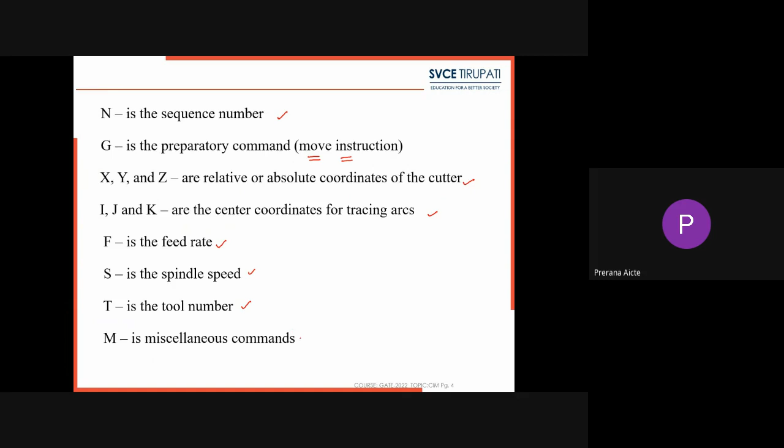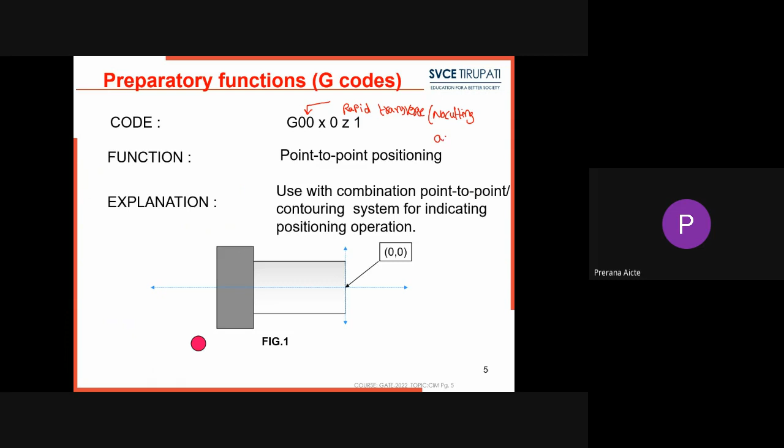Then what is G code? G codes are nothing but preparatory codes. The first is G00. What does G00 suggest? It suggests rapid traverse, meaning no cutting action is performed. This is known as G00.

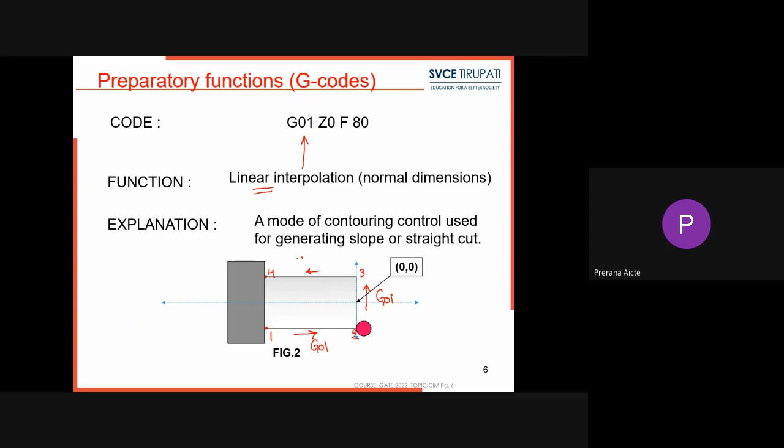The next code is G01. G01 represents linear interpolation, meaning the cutting takes place in a linear direction. Here the cutting tool is moved from point 1 to point 2, so linear cutting takes place as G01. Then the tool moves from point 2 to point 3, again linear interpolation. Next, the tool moves from point 3 to point 4, also linear interpolation, G01.

Then next is G02, which represents circular interpolation. If the cutting tool starts from point A and moves to point B, that is a straight profile, so we instruct G01. But when the tool moves from point B to point C, we instruct G02 because it is circular interpolation in the clockwise direction. Then from C to D it is G01, from D to E it is G02 again, and from E back to A it is G01. So circular interpolation means G02.

Then comes G03, which is circular interpolation in the anti-clockwise direction. If the cutting tool moves from point 1 to point 2, that is G01, and up to point 3 it is also G01. Then the tool moves in an anti-clockwise direction where there is a fillet between points 3 and 4. To communicate this, we instruct the cutting tool as G03 so that it moves in an anti-clockwise direction.

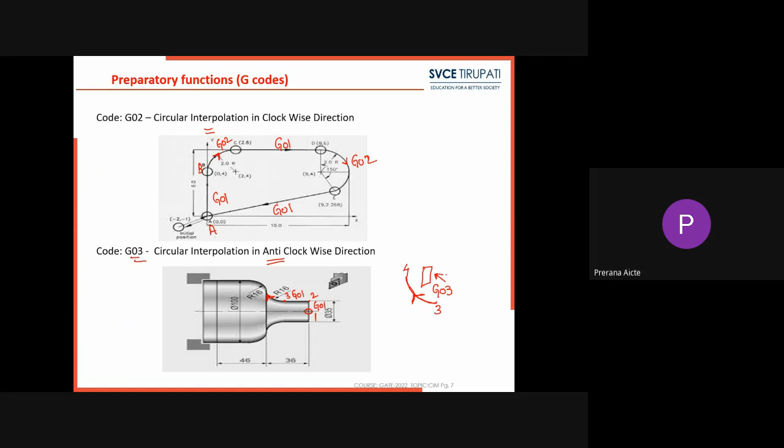Next, let us see some of the preparatory codes. G70 is nothing but dimension in inches. That means whenever we write a program for a workpiece component, the programming has to be given in inches. There are two different types of units used during machining.

The first one is metric units. Metric is nothing but mm. The second one is known as inches. 1 inch is equal to 25.4 mm. So the programming has to be given in metric.

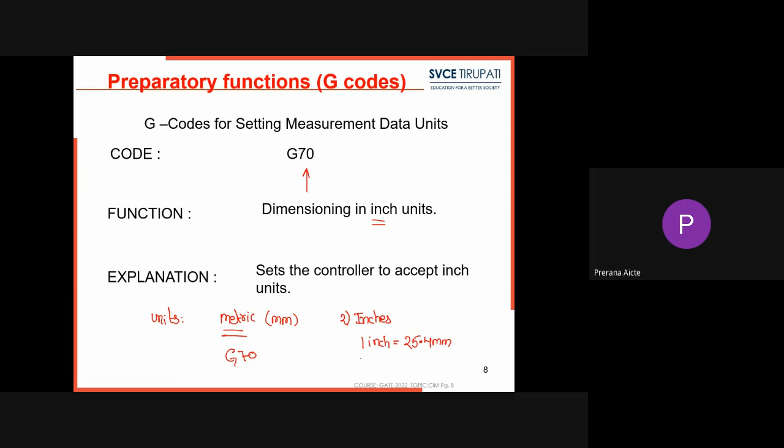If I want to give the program in metric units, I use the preparatory code G71. If I want to give the program in inches, I use the code G70. So G70 is dimension in inches, and G71 is dimension in metric units, that is mm.

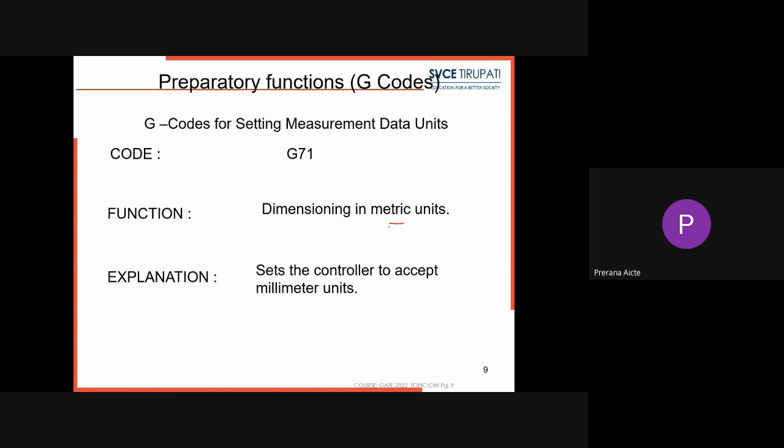Next, G90. G90 is nothing but absolute dimensional input. For example, if you have taken an object, and this is the first point, second point, third point, and fourth point, this is the default position of the cutter. If each and every point takes the origin as its reference, then it is known as the absolute coordinate system.

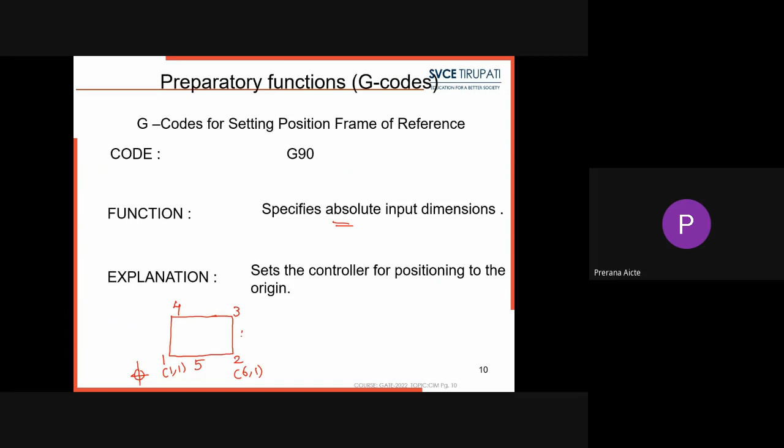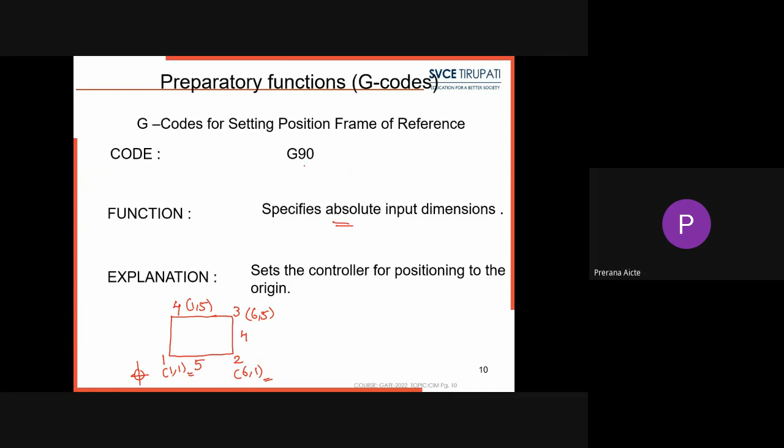For example, if I take the first coordinate as 1,1, the second as 6,1, the third as 6,5, and the fourth as 1,5 — so for each and every point the cutting tool has to move, and each dimension takes the origin as its reference. This is known as the absolute coordinate system. While writing a program, if you are using the absolute coordinate system, we have to specify G90.

Then comes another coordinate system, that is G91, which specifies incremental dimensioning. What incremental dimensioning means: here I have taken a workpiece where the dimensions are taken relative to the previous point. So here I take it as 5, and here as 4, and the cutting tool is normally at the work zero position.

So this is cutting tool position: point 1, point 2, point 3, and then point 4. First, it consists of coordinates of 1,1. The first point takes the origin as its reference, but the second point takes the first point as the reference, so the coordinate should be 5,0, meaning in the x-axis it has to move 5. Then the third point should be 0,4, meaning in the y-axis it has to move 4. Then the fourth coordinate is...

So leftward it is moving. If you take an axis, this one is the x-axis, this one is the y-axis. So this is the positive x-axis, this is the positive y-axis, this is the negative x-axis, and this is the negative y-axis. So if it is moving in the leftward direction, it should be minus 5, 0. Then the final point should be written as 0, minus 4. This is incremental. In almost all CNC programming, we have to use the absolute coordinate system.

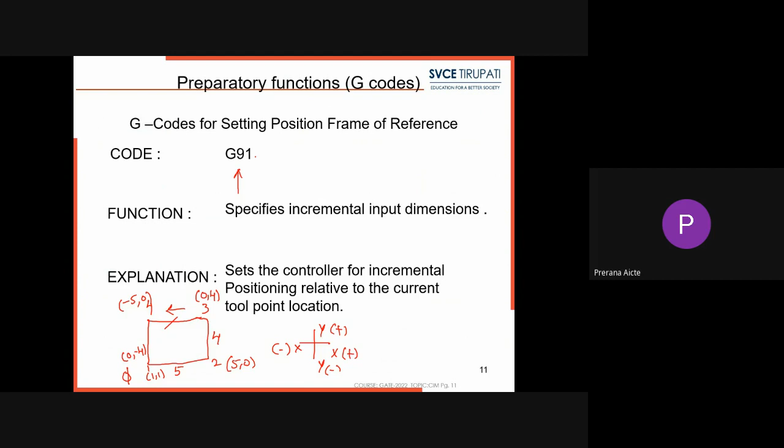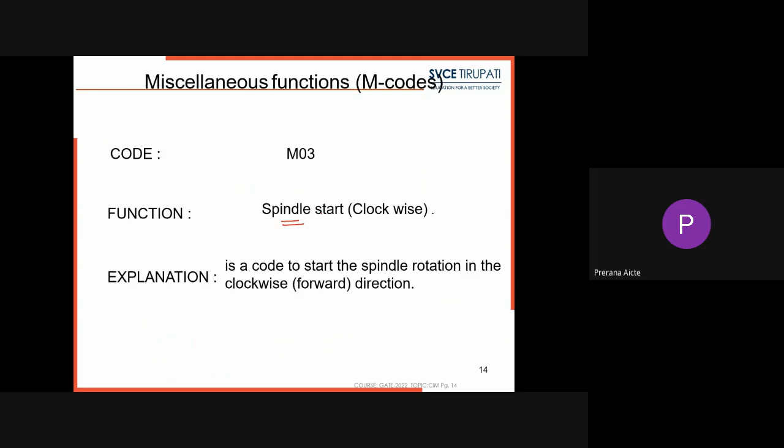The next one is M codes. M codes are used to control the machining operation. Let us see what the M codes are. M02 suggests that the program has to stop. M03 suggests that the spindle has to start rotating in a clockwise direction.

The next code is M04, which suggests that the spindle has to rotate in an anti-clockwise direction. The next one is M05, which suggests spindle stop, meaning the spindle has to stop. The next one is M06, which represents tool change.

During CNC machining operation, the process consists of a number of operations. For example, if you take a lathe machine, we use a single point cutting tool, which is an external tool. The external tool is utilized for turning or facing operations. But if I want to do a drilling operation, then I have to use a drill bit. So how does the drill bit get engaged? We have to instruct the CNC machine for a tool change.

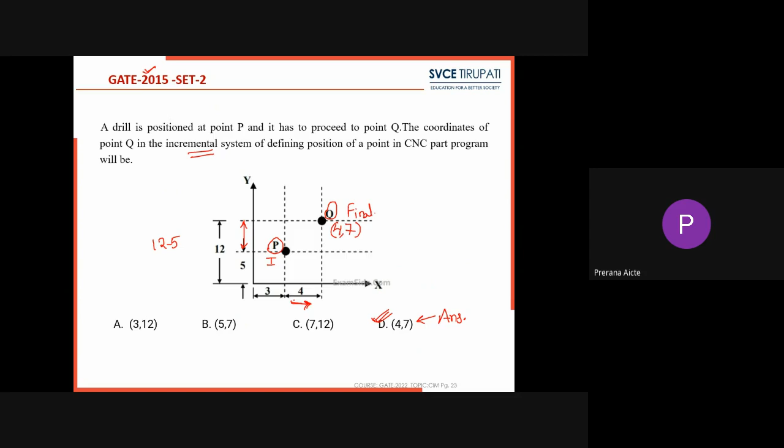This is also a 1 mark question. Next, this particular question was asked in GATE 2015 set number 1. According to this question, the function of interpolator in CNC machine controller is to coordinate feed rate of axis. So this is the answer for this question.

So interpolator is a device which is used to coordinate feed rate. Next is another bit from GATE 2015 set 2, which also carries 1 mark. According to this one, during the development of a product, an entirely new process plan is made.

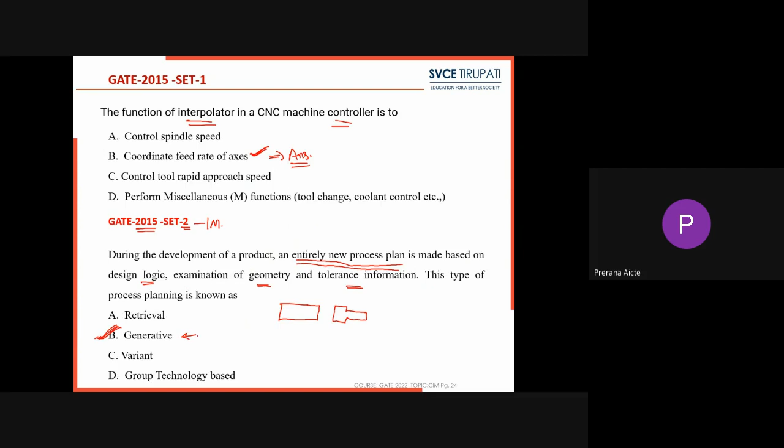During any product development, when an entirely new process plan is made, it is based on design logic and examination of geometry and tolerance information. This type of process planning is known as dash. Process planning is the sequence of operations which has to be performed on a workpiece to convert it into a finished product. During process planning, if we do it for the first time, it is possible only in generative computer aided process planning. So this is the answer for this particular bit.

The next one: consider a robot arm PQ with end coordinates P at (0,0) and Q at (2,5).

It rotates in a counterclockwise direction about P in the XY plane by 90 degrees, so the new pair of end Q is to be found. The robot arm is rotated counterclockwise, and we are asked what are the new coordinates. So how do we find the new coordinates for Q? The new coordinates are nothing but Q dash.

Q dash equals x1 y1 into the rotation matrix: cos theta minus sin theta, sin theta cos theta. Here theta is given as 90 degrees. Substituting the x coordinate as 2,5, cos 90, sin 90, minus sin 90, cos 90. So what is the answer? The answer should be minus 5, comma minus 2.

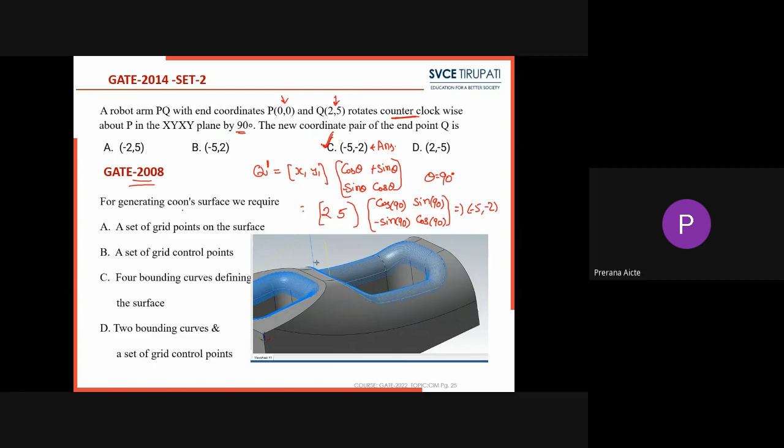Okay, so next, now let's go back further, up to GATE 2008. For generating a Coon's surface, we require what? What is a Coon's surface? A Coon's surface is nothing but this type of patches.

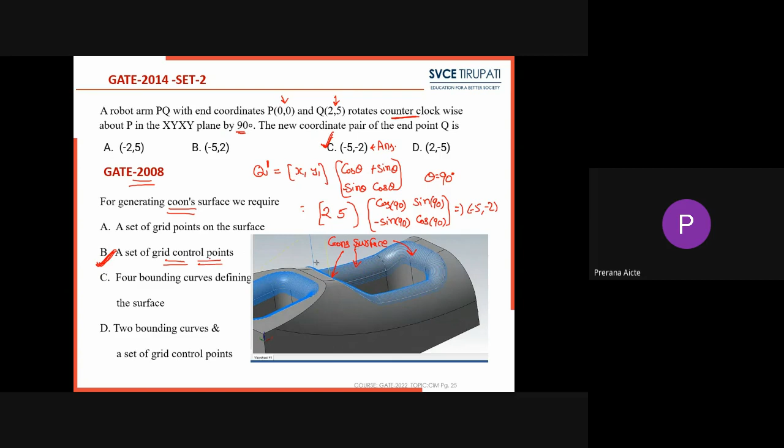This surface is known as a Coon's surface. This area is nothing but a Coon's surface, that means if you have taken a fillet type object for a surface, it is nothing but a Coon's surface. For a Coon's surface, we require a set of grid points. By joining a set of grid points we can create a Coon's surface. So what we require is a set of grid control points.

Next, which is nothing but a GATE 2007 bit: which type of motor is used in axial or spindle drives of CNC machine tools?

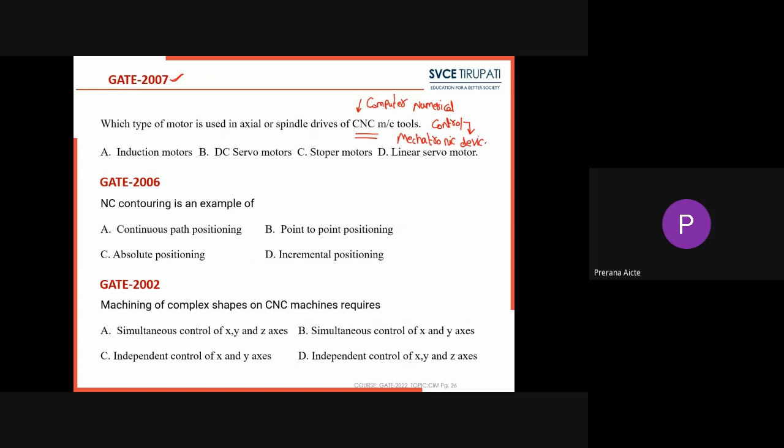So basically, what is CNC? CNC is nothing but Computer Numerical Control, known as CNC. What type of device is CNC? CNC is nothing but a mechatronic device. What is a mechatronic device? It is a combination of mechanical plus electronics, known as mechatronics.

So in almost all mechatronic devices, we are using DC servo motors. So the answer is that DC servo motors are used for motion control in the case of CNC.

Then in GATE 2006, this bit is asked for 1 mark: NC contouring is an example of what? We are having various types of machine tool control operations, where point-to-point positioning is used in drilling.

Then absolute positioning and incremental positioning we know, but these are not related to this particular question. Here we are using continuous path positioning, because in the NC contouring operation, the contouring is used to provide this type of curves.

In the case of curves, the cutting tool has to be controlled in two axes, that means the cutting tool has to be controlled in the x-axis and also the y-axis. So that means continuous path positioning, controlling the cutting tool in x and then y-axis. So the answer is continuous path positioning.

Then in GATE 2002: machining of complex shapes on a CNC machine requires what? If we want to machine a complex shape on a CNC machine, what is required?

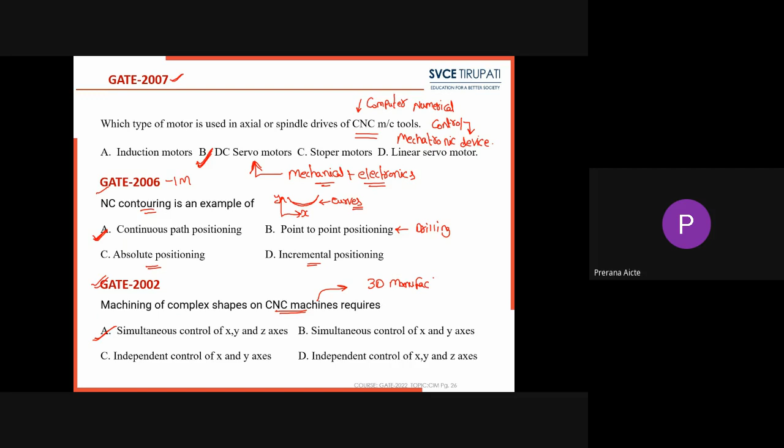That means the machine tool can control in x, y, z axis, and the controlling has to take place continuously. Continuous observation is required, so here it is the simultaneous controlling of x, y and z axis. This is the answer.

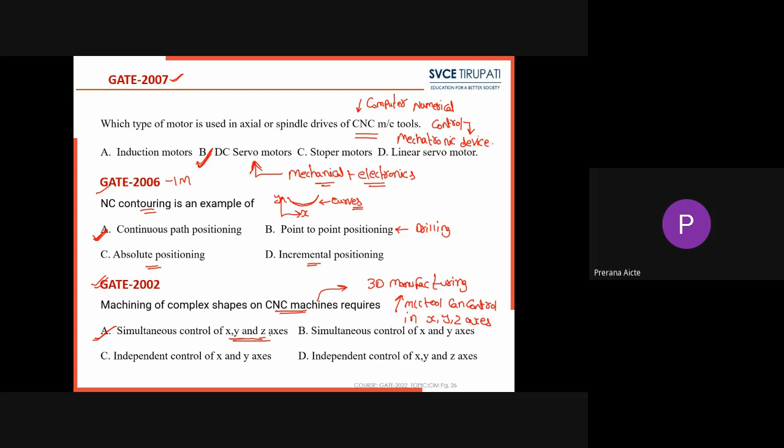Then in GATE 2002, this bit is asked for 1 mark. What is this bit about? In computer-aided drafting practice, the arc may be defined.

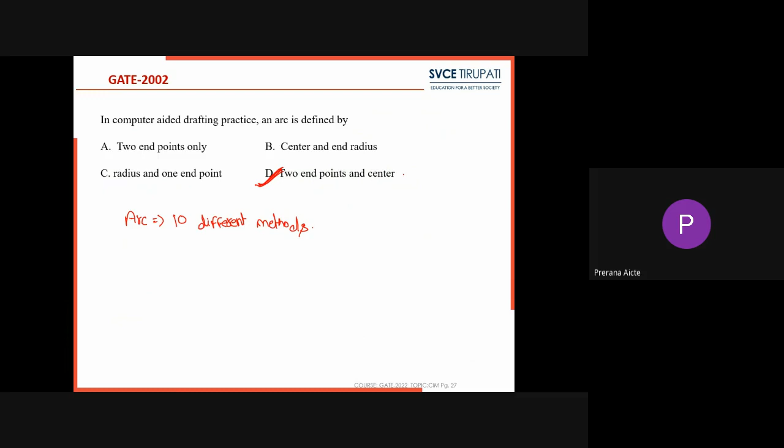Actually, an arc can be defined in 10 different methods. But out of these 10 different methods, the maximum commonly used one for defining an arc is by two endpoints and a center. So this is the particular method of how the arc can be defined.

Okay, let us see. From this bit onwards, we have to check the GATE 2-mark bits, and how they are asked. This one is C: a circular arc on a part profile is being machined on a vertical CNC milling machine.

CNC part programming using metric units with absolute dimensions is listed below. The coordinates of the center of a circular arc are given as two points: first point is x 30, y 55; second point is x 50, y 35.

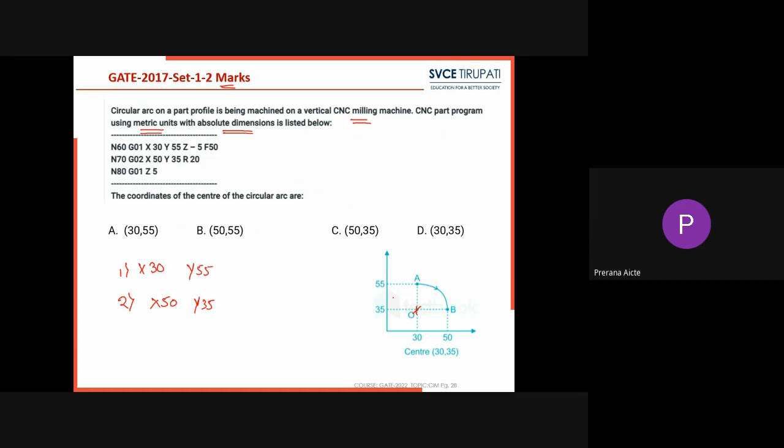So for the first point it is x 30, y 55. For the second point it is x 50, y 35.

Now, how is the arc going to be drawn? The points of the arc come out to be 30 comma 35, taken as the center of the arc. If we have the center, we can draw the arc. As given in the problem, the center lies at x equal to 30 and y equal to 35. This is where the answer lies.

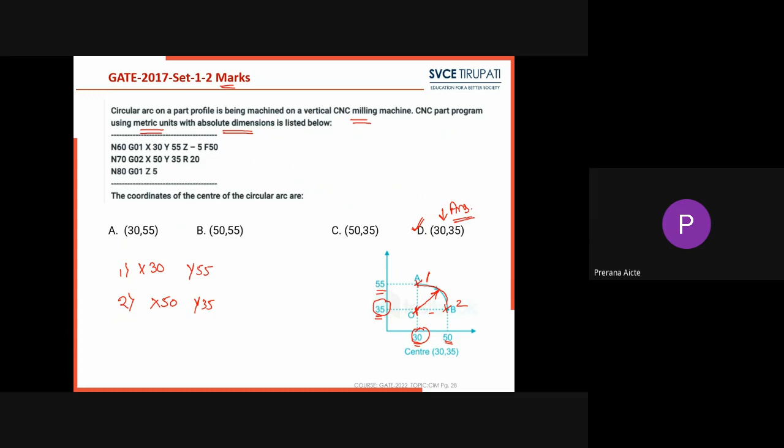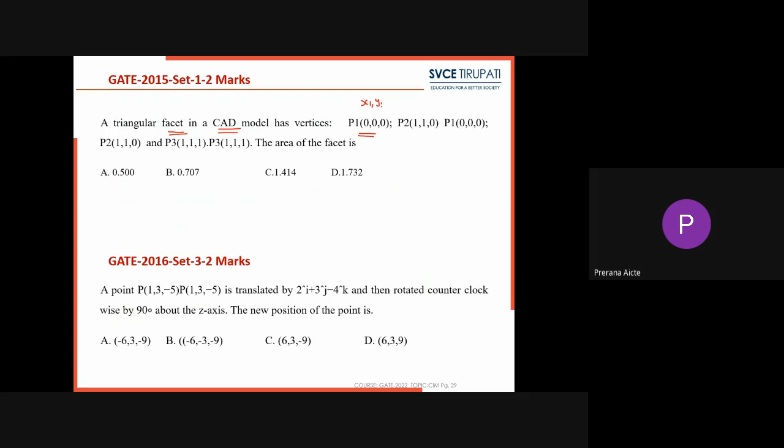Next bit, asked in GATE 2015 for 2 marks, Set 1: a triangular facet in a CAD (computer aided design) model is given with three points: P1 is 0,0,0 meaning x1,y1,z1; P2 is x2,y2,z2 given as 1,1,0; and P3 is x3,y3,z3 given as 1,1,1.

The question asks for the area of the facet. To find the area, we first consider two points, P1 and P2. Distance P1P2 equals the square root of (1-0)^2 + (1-0)^2 + (0-0)^2, which is root of (1+1+0), equal to root 2. So P1P2 equals root 2.

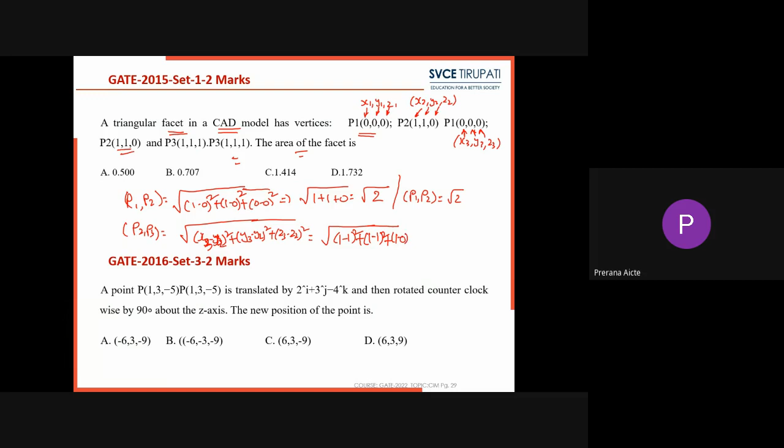Then comes P2 to P3. Taking these two points: (x3-x2)^2 + (y3-y2)^2 + (z3-z2)^2, equal to (0-1)^2 + (0-1)^2 + (0-0)^2... so this is P2 and P3 distance, which works out to (1-1)^2 + (1-1)^2 + (1-0)^2, equal to root of 1 squared, equal to 1.

So the area formula is half into root 2 into 1, which gives area equal to root 2 divided by 2, equal to 0.707. This is the answer for the area of the facet. In this particular bit, we consider the answer as 0.707.

Then comes the next one: here also a point P is given as 1, 3, minus 5, and it is translated by 2i + 3j minus 4k, which is rotated about the z-axis. The new position of the point is minus 6, 3, minus 9.